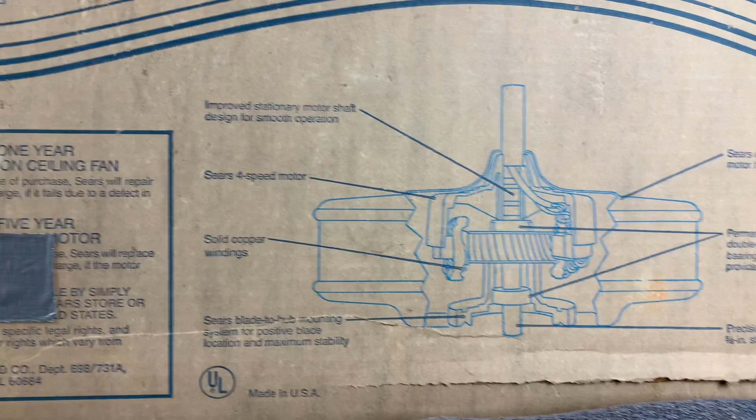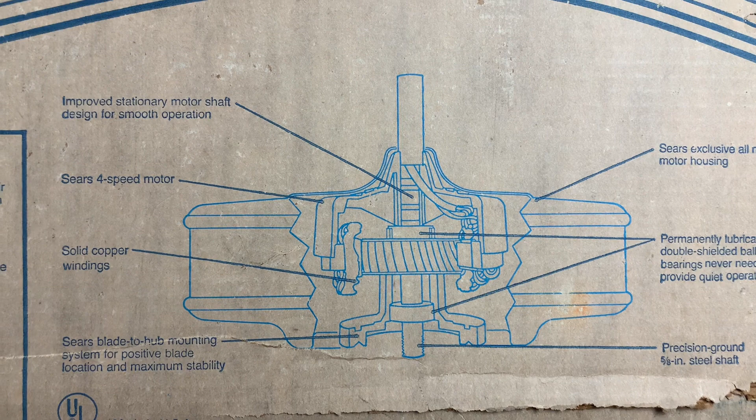So down here they detail that there's a 1-year warranty on the fan, a 5-year warranty on the motor, and they have a line art drawing of the fan, which is UL listed and made in the USA. And it apparently includes improved stationary motor shaft design for smooth operation.

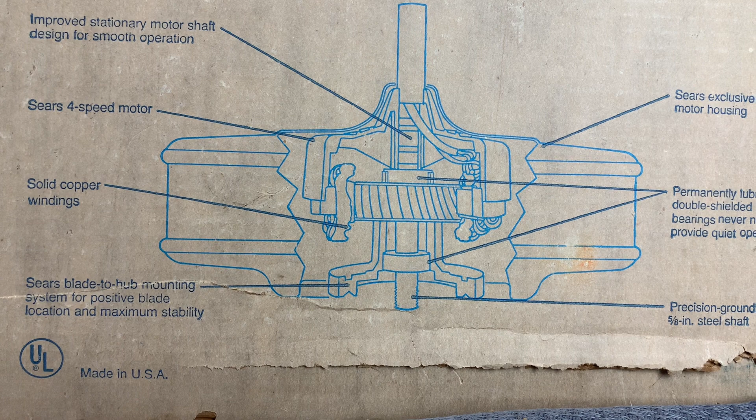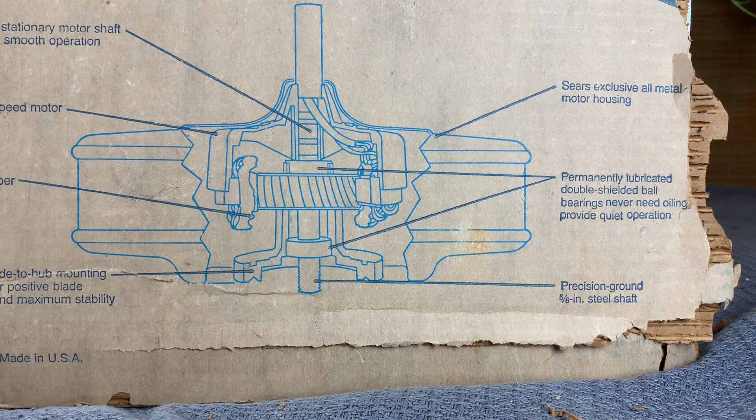It advertises that it has a Sears 4-speed motor, solid copper windings, Sears blade to hub mounting system for positive blade location and maximum stability, Sears exclusive all metal motor housing, permanently lubricated double shielded ball bearings never need oiling and provide quiet operation.

And it has a precision ground 5/8 inch steel shaft. Now the motor that is shown here is accurate. That is a KB55 motor. It is a stack motor. It's essentially a...

I don't want to say stripped down, but it is a stripped down version of the K55 motor. Instead of a rubber flywheel, you have an aluminum flywheel. It is one piece, and it is the rotor. So there is no rubber isolation in this fan. Everything is metal on metal, and these fans do hum.

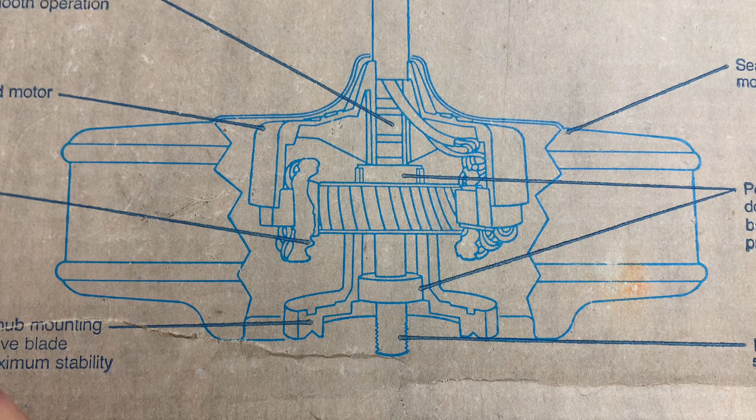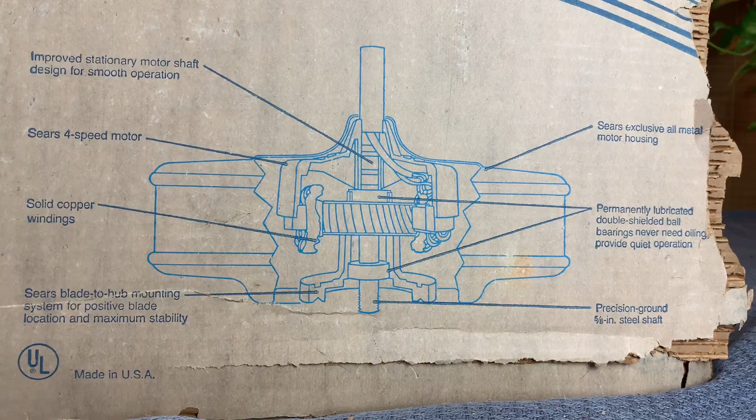It's worth noting that this fan is the exact same as the Emerson 1895 series from this same era. The only difference between this and the 1895 -- another cat wants to intervene -- the only difference between this and an 1895 series from the same era is the vent hole pattern.

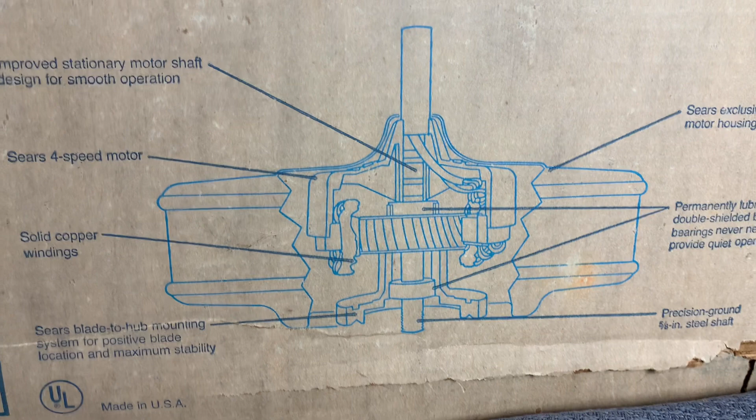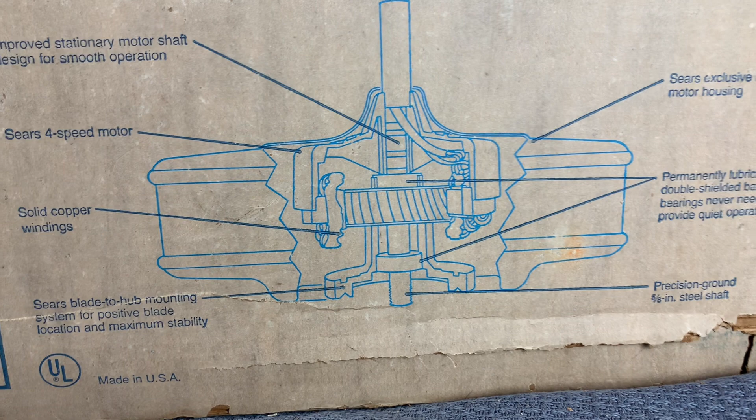So it's the same down rod, the same motor, the same motor housing, the same switch housing, switch cap, blade irons, blades, everything is the same, but they put a different bottom plate. The top plate is actually the same. They just put a different bottom plate with a different vent hole pattern for the Sears fans.

So it's a little bogus to say that it's a Sears 4-speed motor, because you could definitely get a 4-speed 1895 series outside of Sears. Lighting showrooms sold them. Ace Hardware sold them. Home Improvement Center sold them.

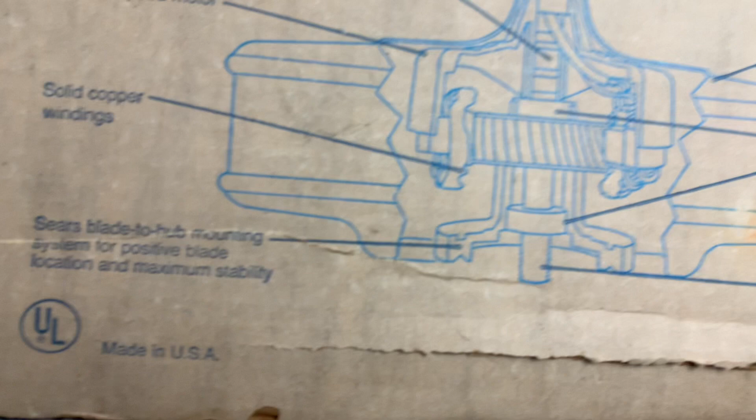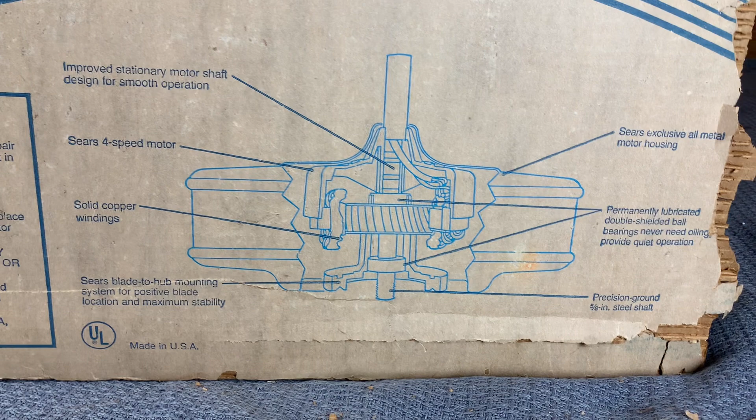Also, when it says it is a Sears blade to hub mounting system, which is their way of trying to polish a turd and make it sound like it's good that you don't get a rubber flywheel, that is also not a Sears exclusive. Again, everything that you're getting here is identical to the 1895 series, which was widely sold everywhere from True Value to high-end lighting showrooms. So the only thing Sears about this is the bottom plate.

So now let's go ahead and unpack the fan and see what's inside the box. Before we do that though, let's take a quick look at the fans currently installed.

This is an SMC Laguna, the Kmart version. It has the brown switch housing, 3-speed, with a slag glass light kit that I got from Dan Newman. Came out of a place that went out of business in Menasha, Wisconsin. I'm probably the only person in Florida that has imported Wisconsin lighting. So we got the little 36-inch SMC Laguna here.

J-hook, very nice fan, 4-speedified. This is speed 3, medium low. 36-inch Hunter original.

Sing us a song here, the piano fan. Right here over my piano is this Thomas Fasco. Over here we have a Fasco Charleston with a Newtone knockoff Saturn light kit and a Thomas Edison style bulb in there. That fan is what's going to be coming down and getting replaced with the Emerson.

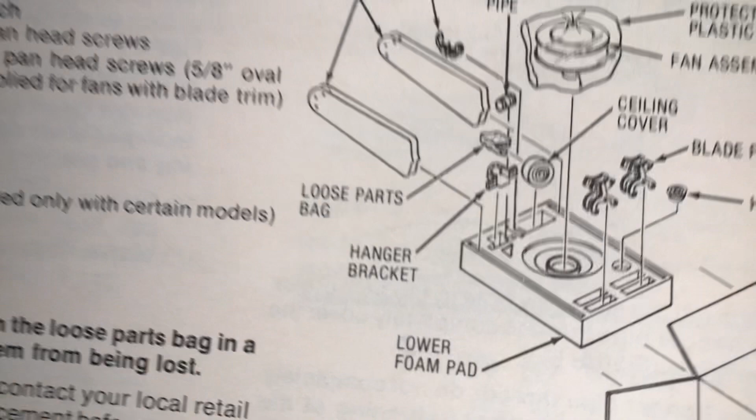So if we go ahead and open it, I do like when the box art, or when the artwork matches what you actually get, and I have to say, this is remarkably accurate.

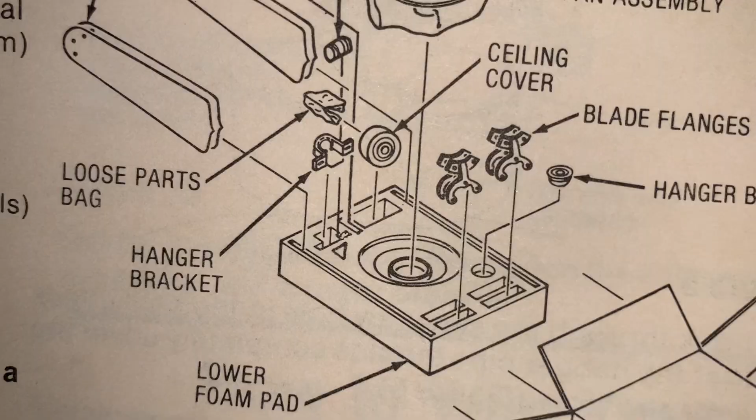4 little blade irons stored in individual cubbies. Pull chain in its own cubby. This fan is completely new old stock. Blades are shrink wrapped. Got a mounting bracket, down rod, hardware, canopy.

Blade badges. So I got this fan from a collector through a collector. This is from another fan collector, Steven, and it came to my attention via Dan Newman, so thank you to both Steven and Dan. Without both of you, I would not have this fan.

Some really nice stencil work on these solid wood blades. Seem to actually be really nice. Wingtip blades. Let's go ahead and get the condom off the motor.

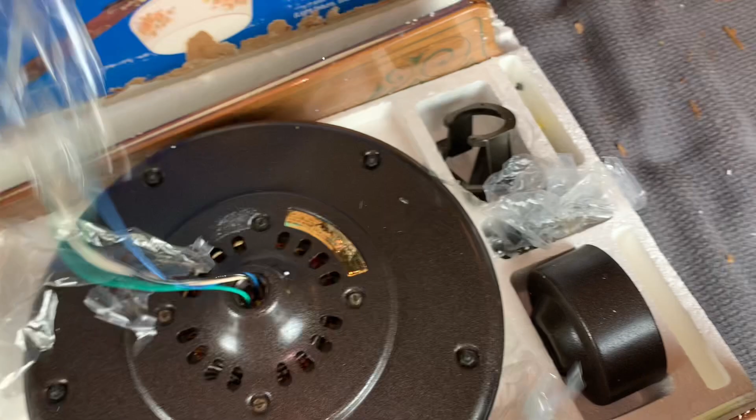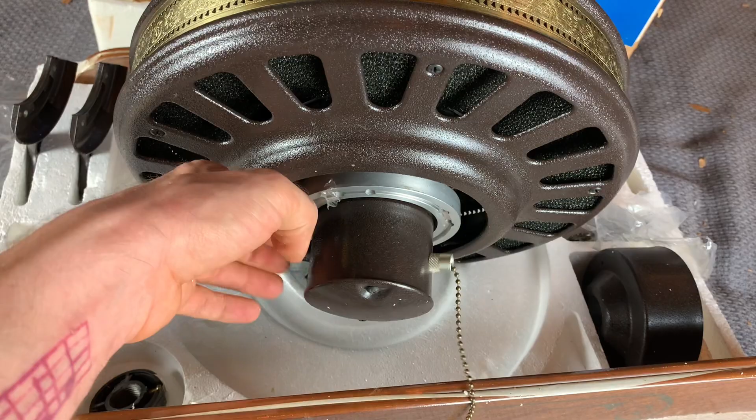So this is what it looks like fresh out of the box. This appears to have come a little loose in shipping. I'm going to have to tighten that up, but that's not a problem. It's held on with a nut inside.

So everything is very nice and shiny, copper windings inside there, nice and shiny. The paint, the Chesterfield brown paint, glistens. The brass is in very nice shape.

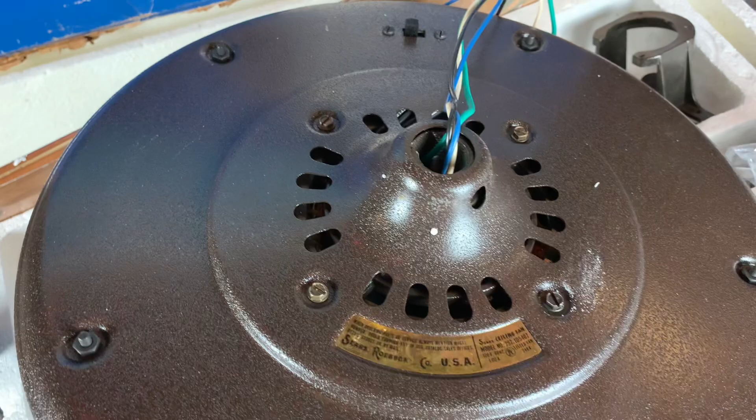The Sears sticker is as shiny as the day it left the factory. There's that same model number that you have listed on the owner's manual, rated for 1 amp. And anyone who's familiar with an 1895 series will recognize this top plate is most definitely from an 1895 series. Reverse switch located on top of the motor housing.

So let's go ahead and get the Fasco down and get this fan up.

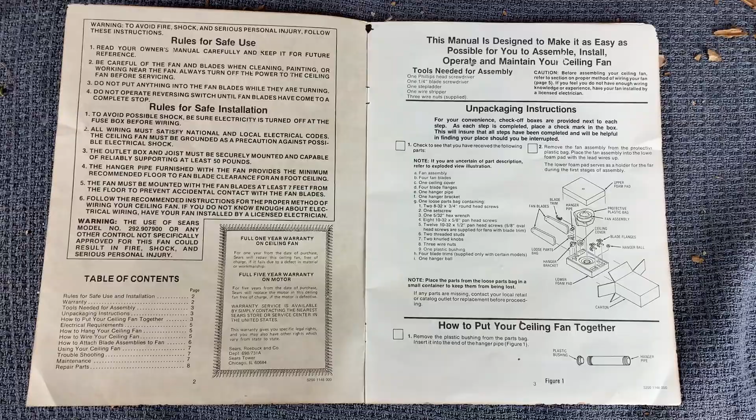So for those of you who want to see the manual, here are some shots of it. You can just pause your video to see what you want to see. Again, if you want to actually read this, just pause the video. Notice that they show one way of mounting it without the blade trims and one way of mounting it with the blade trims.

Notice that they use the artwork from an 1895 series here. Also an earlier version of the 1895 series that had the tapered switch housing and the flat bottom cap. So in the world of 1895 series, the original 3 generations of them were all 4-speed before it became a 3-speed fan.

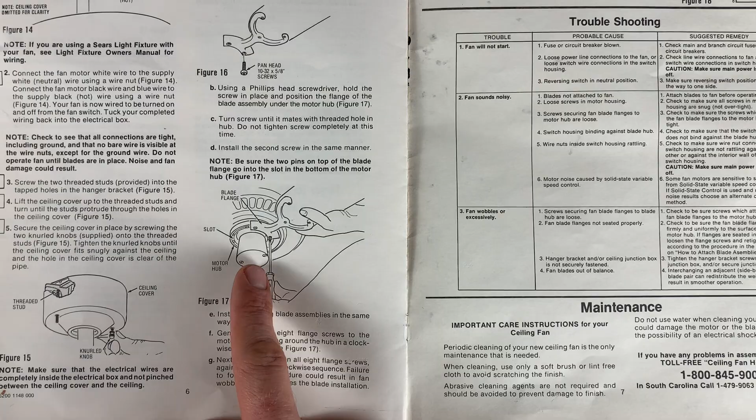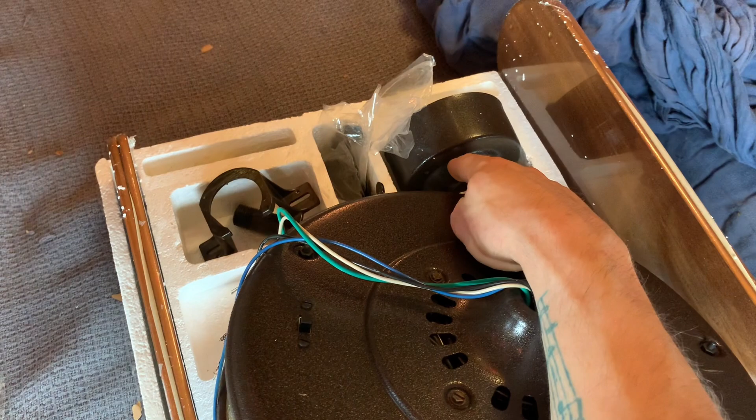The 4-speed version was available anytime you see the flat switch cap and the tapered housing, that's a 4-speed 1895 series. Then they switched to this version with a straight switch housing and a rounded switch cap, and that was still 4-speed if it came with a tuna can canopy. When they switched to 3-speed, they switched to the new style canopy. So any 1895 series with that canopy is going to be a 4-speed fan.

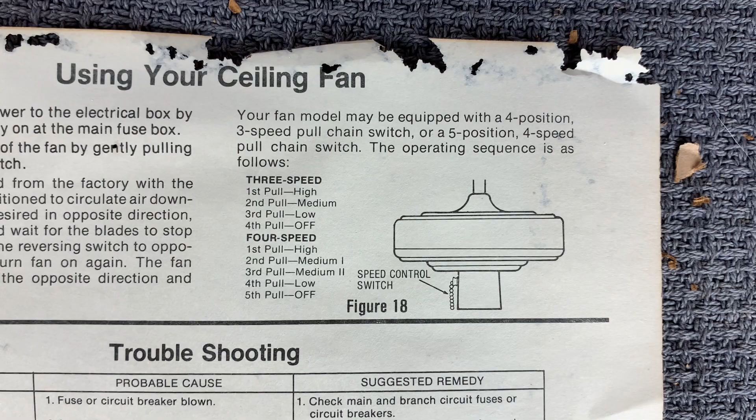Not everyone with that switch housing and switch cap is going to be a 4-speed fan, but some are. Not everyone with that switch housing and switch cap is going to be a 4-speed fan. And you'll notice in the instructions up here, they say that it may be equipped with either a 3-speed or a 4-speed switch, and they give you instructions for both.

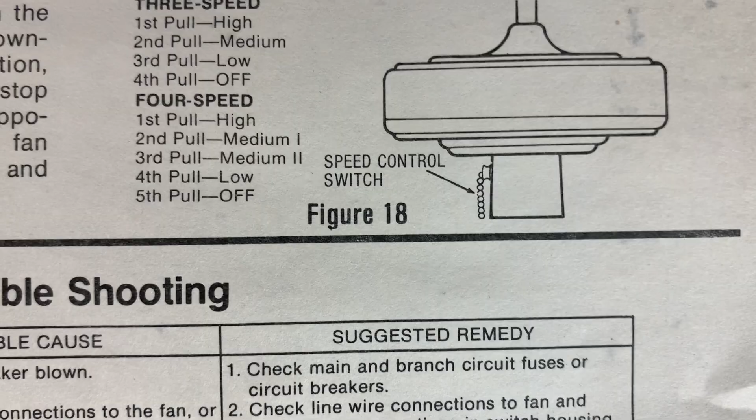And for some reason in this picture, they show that thing hiked all the way up to the flywheel like an old man's pants. And then there's the parts breakdown on the back page.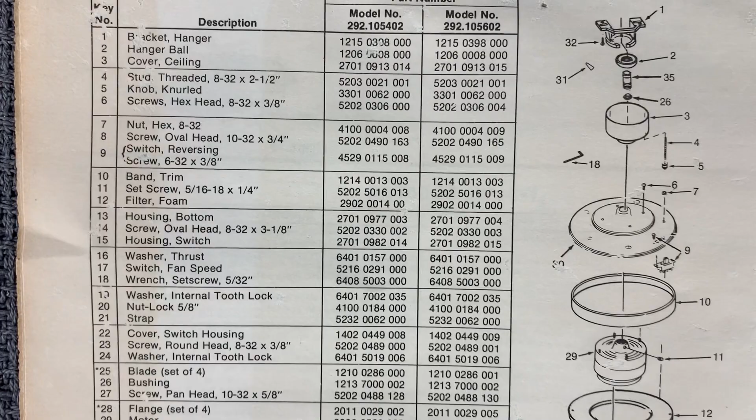I do think it's interesting that the part number is different for the reverse switch, which is number 9 here. You notice it ends in 008 for the brown fan and 009 for the white fan. Or maybe that's vice versa, which one's white and which one's brown. But I don't understand what about the reversing switch would be different.

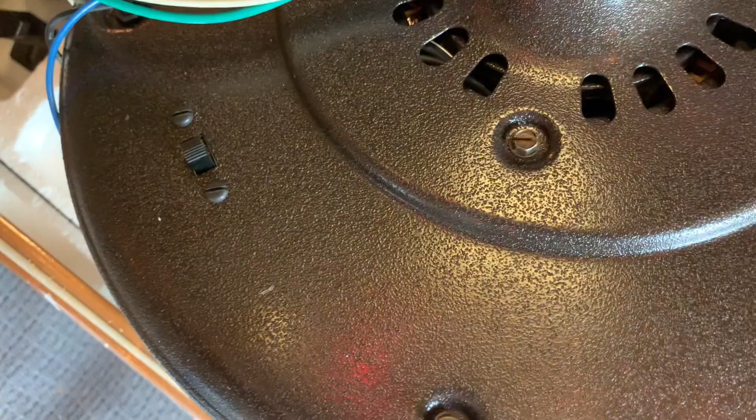Unless it's the screws. Maybe they used these black painted or antique brass screws here, and maybe you got polished brass screws on the white fan, because the switch itself is black no matter what. There wasn't like a white switch on the white fan. So anyway, there's a mystery for you.

All right, let's go ahead and do the install. All right, so here it is installed. This is the Sears / Emerson TOC, turn of the century.

So again, big thanks go out to Stephen and Dan for making this dream come true. I have wanted one of these fans new in box since at least 2003.

These fans were pretty common back in the day. The first place that I can remember really falling in love with one was Jabberwocky Bookstore, which is in Massachusetts. I don't remember exactly what town, but there's a town somewhere up there on the coastline north of Boston where I used to visit family.

And locally there was - I don't know how to describe it - not exactly a mall, but a sort of maybe like a converted factory warehouse type building, you know, like one of those old brick Victorian factories that people might make into very fancy loft apartments now. But this had been made into a bunch of different retail spaces. There were just a bunch of little small local businesses there.